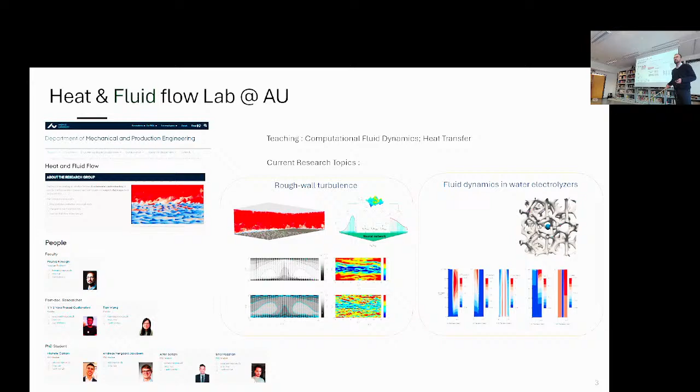Oops, I think I'm disconnected. I can see the presentation here, but maybe the cable is not... Okay, now it's coming, I hope. I just clicked, I don't think it's enough movement.

Well, of course, I need to motivate why roughness or rough surfaces are important. There are many real-world applications in which the solid surfaces that are in contact with turbulent flows are not smooth - as a matter of fact, this is the rule rather than the exception. Smooth surfaces are rarely found. Some examples: if you look inside a pipe, a ship hull, or zoom on a turbine blade, or many other applications, you see that the surface is rough. The main effect of roughness on the flow is, of course, a drag penalty - you have more drag on the rough surface. It's important to remember that roughness looks differently depending on where you look. In either of these applications, the texture and topography of roughness is different, and depending on that texture, the amount of drag penalty can be very different, even if you have the same roughness average height, so to say. That's basically what motivates this research.

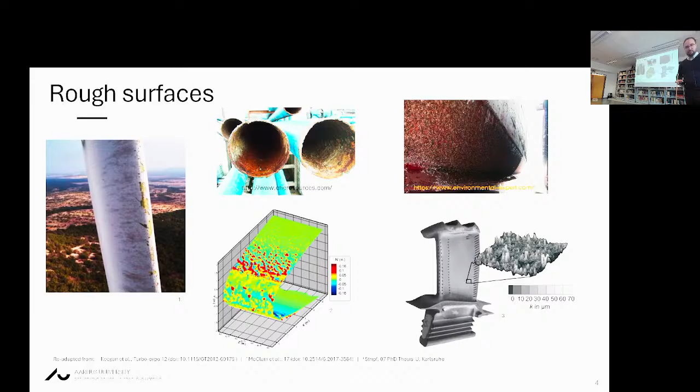Yeah, okay. Okay, good. So I think I need your help every 2 minutes. This is going to take 2 hours, hopefully not. Okay, so sorry for showing this.

Everyone who passed Fluid Mechanics 1 knows this diagram, but it's mandatory to show it if you're talking about roughness. This is the so-called Nikuradse diagram from the 1920s-30s. These experiments were done in Göttingen. They roughened the pipe with uniform sand, and depending on the normalized size of this sand, if the Reynolds number is large enough, the friction coefficient only depends on the size of the roughness.

That is what we call a fully rough regime. Now the question is, how about the case when you have a different type of roughness that is not the sand grain, which is of course the case most of the time. If you have any arbitrary roughness, and you reach the fully rough regime, you match one of these sand grain sizes, and that's called the equivalent sand grain roughness of that surface.

So basically, Ks, or equivalent sand grain size of roughness, is a sort of currency. How rough is your surface? This is like this sand grain, right? So that's how we do it.

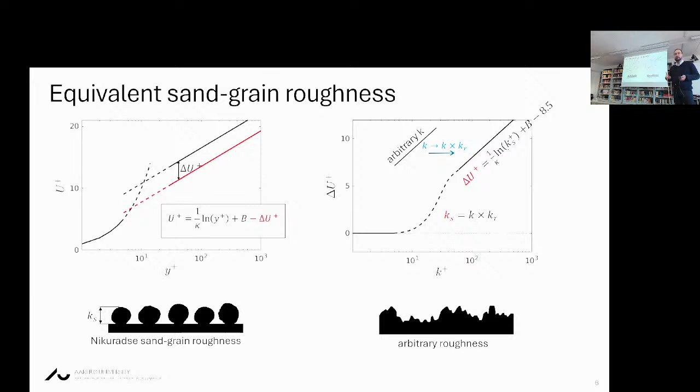So that's how you can actually find this quantity by running experiments or so. Well, the reason why this whole business started was in my institute.

It's a very practical reason. Someone came to us and said, okay, I have this piston, like it's an internal combustion engine. There was a time when people did research on internal combustion engines. So it's quite old, I would say—not very. Until 5-6 years ago, people still thought there was a future.

They wanted to run RANS simulations on this surface, but they didn't know the equivalent sand grain roughness of their sample. The question is, okay, what is that? And there is no way to know it. This is quite important if you want to run RANS simulations. So we basically scan this surface, and then we run numerical experiments, because it's much cheaper than actual experiments.

And they are not perfect numerical experiments, I have to say that.

So basically, we run DNS of turbulent flow in this classical periodic box with walls at the top and bottom. So basically, we put the rough surface at the wall of our domain.

And then for the simulations, we use SIMSON, which is a pseudo-spectral solver developed by KTH people, like Philipp Schlatter and his group. We also implemented an immersed boundary method, and pseudo-spectral and immersed boundary are not the best friends, but somehow there were suggestions that it can be done. And then we implemented that, and this is just an example of how the flow field would look like.

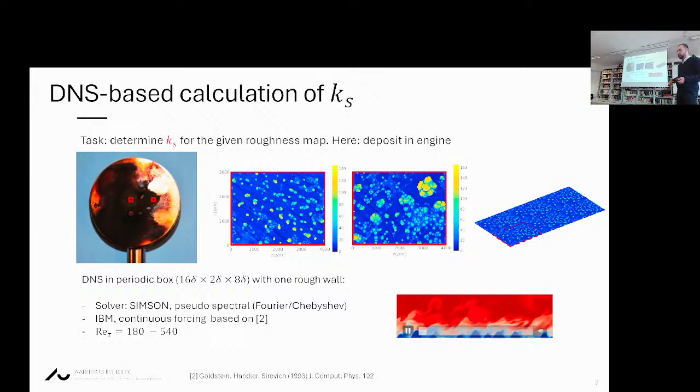This is the temperature contours on top of the roughness elements. I think temperature is a better way to visualize what you're doing. So, okay, now I think again some help because it doesn't go.

Okay, now it works. So, well, we run DNS at different roughness heights. So when you change the Reynolds number, of course, the physical height of roughness in viscous units becomes larger and larger, and you see this downward shift. You can measure it, and then fit into the Nikuradse asymptote, and you find the sand grain size of the roughness. So in this case, we determined that the sand grain size is 290 micron for this roughness, and this is the physical size that I put a scale here that you can see.

And you cannot really find 290 micron anywhere in this picture. It's important to know that Ks, or the equivalent sand grain size, is not a physical size. It's like a flow quantity. It's not a measurable physical quantity. You cannot really find this anywhere.

It has to be larger, otherwise it's smooth, right? It behaves as smooth. I don't know, well, actually you can say this.

K plus is here 10 to... so basically, this K plus is what you're asking for. So it's about 70-ish. You can't go too high. That's a problem with DNS because it becomes very expensive. But you just have to go high enough to reach that asymptote, which in our case is 70.

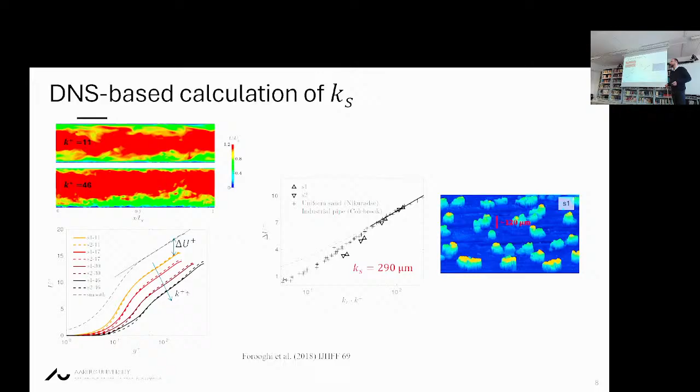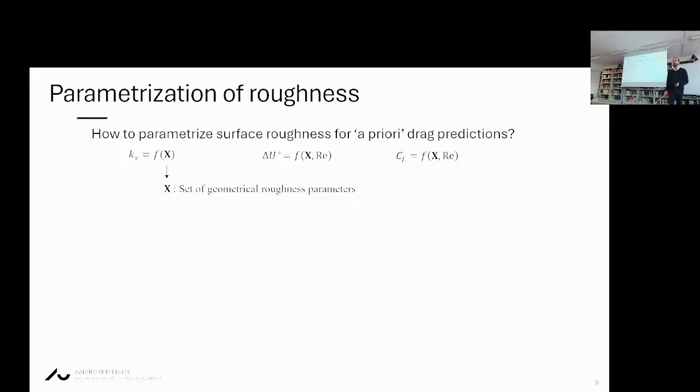So basically, now here is the proposition. We want to find Ks as a function of x, and x is a set of geometrical roughness parameters. It's equivalent of saying I want to find the roughness function, then it's a function of x and Reynolds. So at this fixed Reynolds number, roughness function is uniquely related to Ks. You can say the same thing about skin friction coefficient. And then the question is what parameters you should use.

So if, let's say this is the roughness profile, it's of course always irregular. And then you can of course have the PDF of the roughness height. There is the tendency to use, let's say, the moments or the properties of this PDF function of roughness height as the predictive parameters in such correlations. So you can use the RMS height, skewness, kurtosis, or just the max minus mean roughness height. And there is also some people use this so-called effective slope, which is the mean streamwise slope of roughness. This is not a moment of roughness height itself, but it's a derivative, the first derivative in streamwise direction.

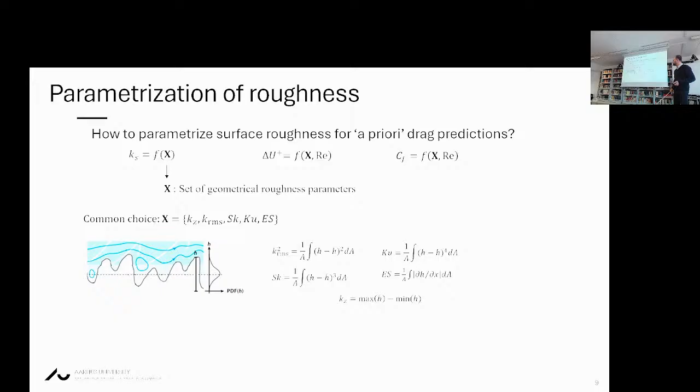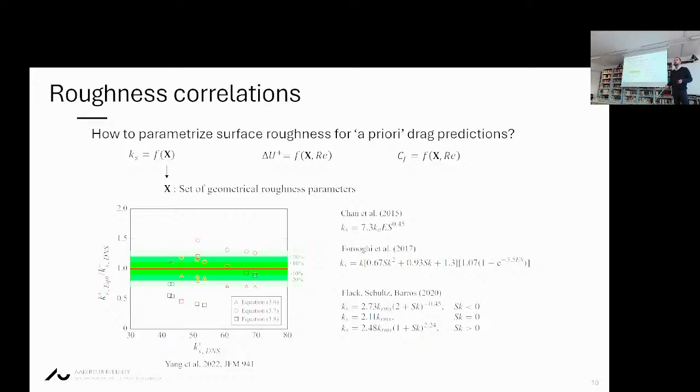And of course, there are many more correlations, but believe me, they are all more or less in the same range. So, and then what does it mean? Basically, what do we lose if you lose this predictive power? What does this error translate to? So there is this nice paper, Annual Review of Fluid Mechanics from 2021, and I just take these estimates from that paper because it's kind of a big claim.

They estimated a 10% uncertainty in prediction of drag, and calculated how much that costs in dollars or euros for different sectors. The shipping sector, aviation sector, and wind farm sector will face a lot of uncertainty because they cannot predict the drag accurately. This is the type of figure we use a lot when writing grant applications, so you see it's an important problem.

But I do it because I find it interesting. Of course, it's also important for real world applications. And if you have a heat transfer problem or mixing problem, the uncertainty can be even more significant.

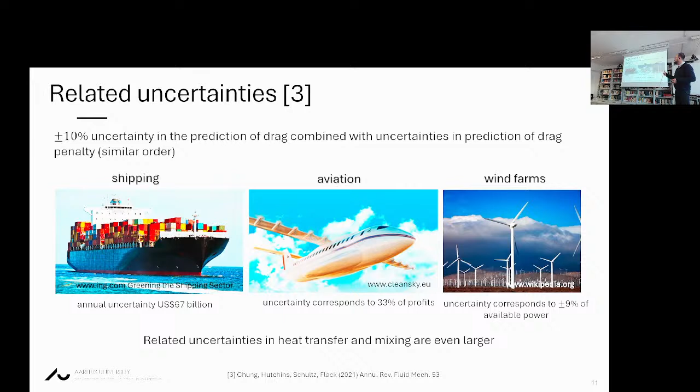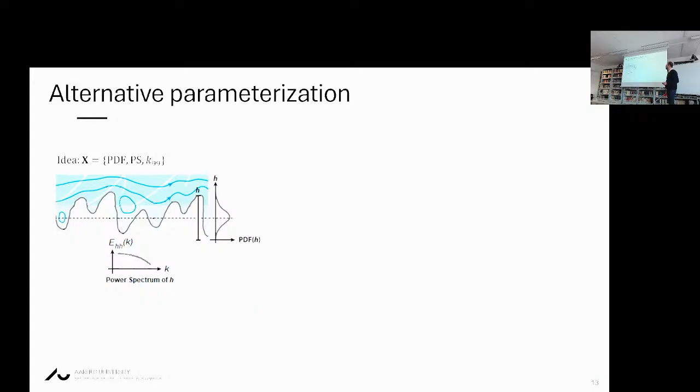To try this idea, we thought we need many samples with different PDFs and spectra, and then try to fit a curve. Generating samples with different statistical properties is by itself not a trivial task.

So we use some sort of mathematically generated roughness, which we call pseudo-random, and happily we found an algorithm already published. You can basically prescribe the PDF and spectrum of the roughness distribution, and the output of this algorithm will be the actual roughness realization.

There is some randomness because it's a lower order input compared to the actual roughness you get. So it's still stochastic, but pseudo-stochastic, since you prescribe some input about what you want. Here you see 3 different PDF functions and 2 different spectra, and the combination gives you 6 different roughness samples that look different.

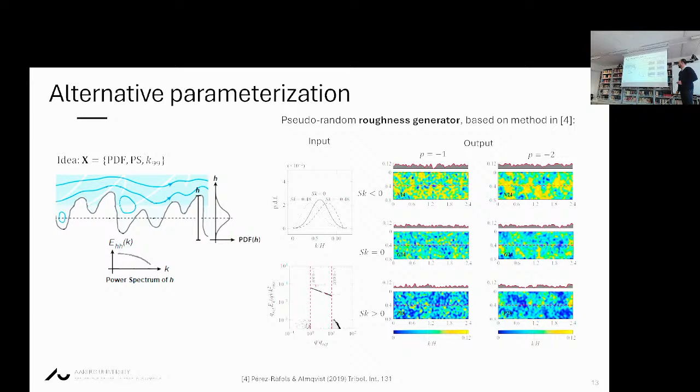For example, if you have a higher slope in your spectrum, it means smaller wave numbers, or large wavelengths, have more contribution. In the realization, you can see larger structures in the roughness. Anyway, this is how we generate roughness. Then of course the question is, does this artificial roughness behave like the actual roughness?

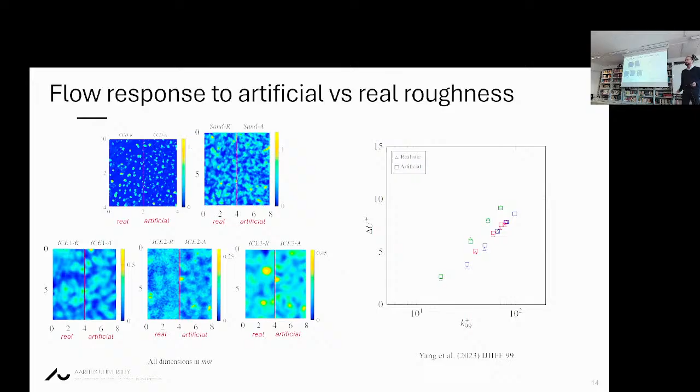But also, when you run DNS for both real and artificial and compare the roughness function, they are almost always on top of each other. So this is a true representation of the roughness.

The other problem you'd face if you want to run a lot of DNSs is computational cost, because even one DNS is expensive, and as I explained, you need high Reynolds numbers, so this is extremely expensive. One reason DNS for turbulent flows is so expensive is because you need a large enough computational domain so that you can capture most of the energy containing structures.

One idea is to use the so-called minimal channels, where you reduce the size of your domain in the span-wise and stream-wise directions. This is a brilliant idea—of course, unfortunately not my idea. We took it from someone else, but we proved that it actually works.

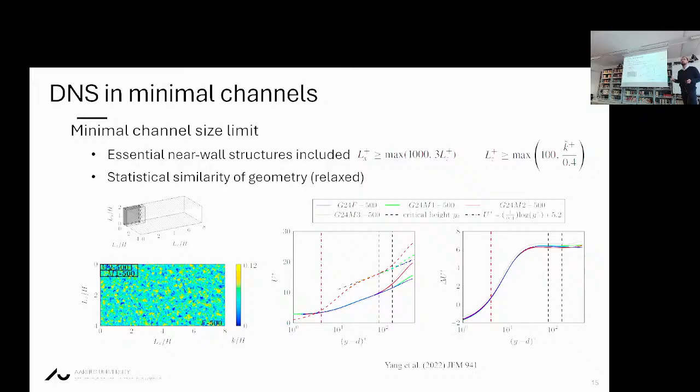So with this idea, we could now do a lot of DNS, much more than anyone would be able to do in a full channel.

So now we have an idea: we want to use the PDF and power spectrum of roughness as input and get the KS as output. Our model is a neural network, and the only reason we use it is because we think it's a good way to fit a nonlinear curve when you have a lot of input, a high order input.

As the input layer, you have the discretized form of the power spectrum and PDF. We discretize it, and each one is one input value or input node. You have some hidden layers, and the output is the normalized equivalent sand grain roughness. We normalize with K99, which is the 99% interval of this PDF—it doesn't matter, K99 is just a physical scale of roughness that we use to normalize.

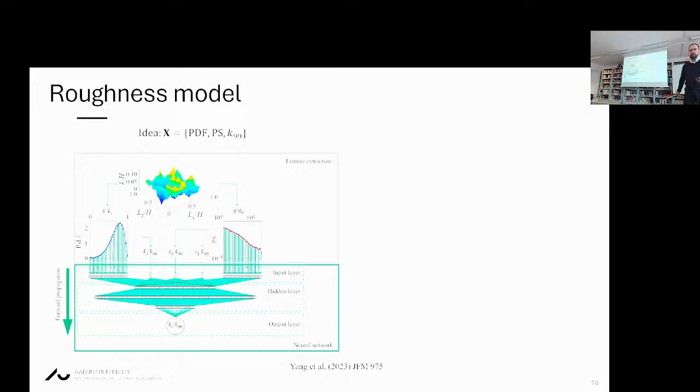I'll try not to explain too much since it's not critical, but basically we randomize the roughness generation method and produce many roughness samples that are very different. Through an algorithm we learned from other people, we picked the 80 roughness samples that are most informative, that minimize the uncertainty of the model the most. This is what we call design of experiment, or active learning, or whatever—statisticians have a name for it, others have different names, but that's basically what we do.

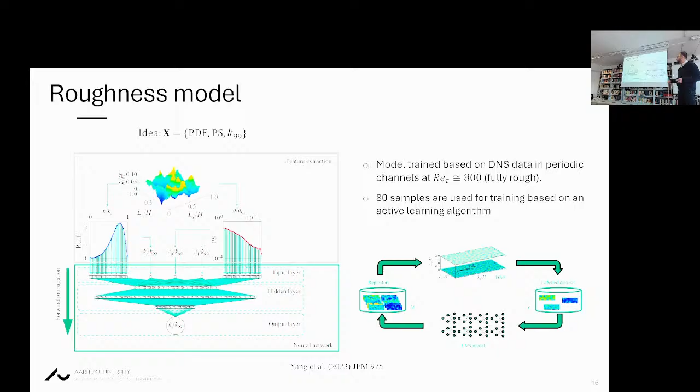We pick up the experimental points in a place that minimizes the uncertainty of the whole model. Here I show some of the samples, some of the roughnesses we use to fit this model to, and you can see we have quite some range.

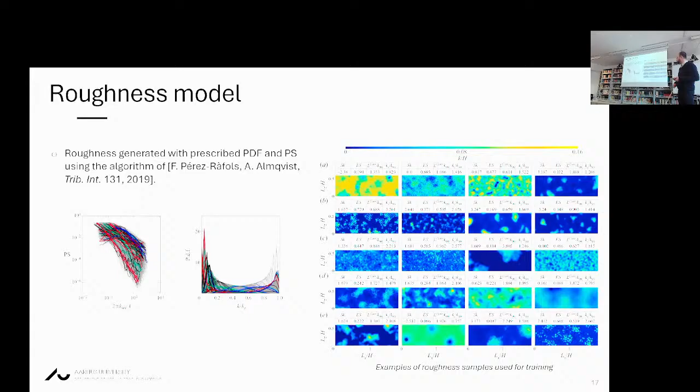Here you see the range of PDF and power spectra. We use Gaussian PDF, Weibull distribution, and bimodal. These are the types of PDF that people say can represent roughness in the real world, based on what you learn from literature. Now the model could reach an accuracy of about 10% or less on the average error, and the max error is between 20 to 30%, which, depending on who you ask, can be just a marginal improvement or a great improvement.

When we test the model, we split the test data into 3 data sets. The first data set is the test cases generated with the same algorithm, so we call it internal. These samples are not seen by the model, but they're generated with the same algorithm, so maybe there's still a little bit of familiarity because it's the same type you trained with.

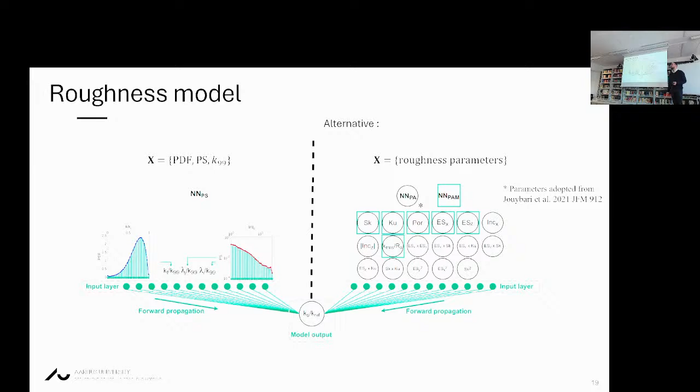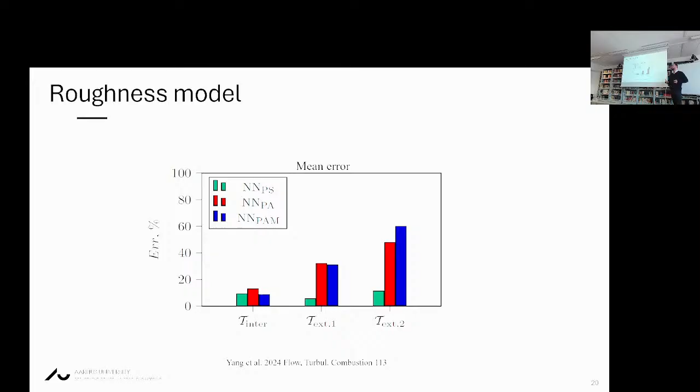Anyway, these are models trained not with PDF and PS, but with a selection of parameters. The input is different, and the error increases, especially if you test against a different type of roughness. But if you use PDF and PS, we claim you have some sort of generalizability. They include enough information for the model to be able to generalize.

Next, we thought, okay, we trained this neural network and there's probably a lot of physical data embedded in this network, which is very hard to interpret because at least I don't know how to interpret how a neural network works. Maybe Paula, you can help us with that. But it's quite some headache, right?

So we learned from some machine learning people about this so-called layer-wise relevance propagation analysis. What does it do? When you have a neural network as a model, you have different layers. The input given is given at the first layer as a vector, and there's this way of calculating how relevant each value of the input is to determine the final output of the model for a certain point.

Let me give you an example, this is how I understand it. Let's say you have a neural network to classify these three photos: is it a horse, a cat, or a bird?

Your model takes pixels as the input, to say, for example, this is a bird. Now, if you apply this layer-wise propagation, whatever it is called, it gives some pixels a higher relevance score. It's telling you that the pixels around the profile of the bird are more important in determining if it's a bird or a cat. So if a pixel here doesn't really matter, right?

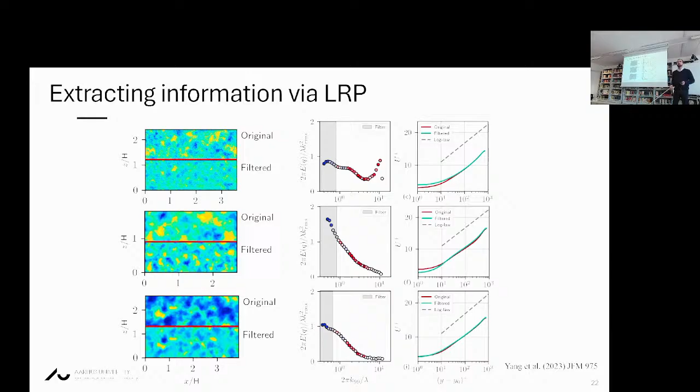We showed this with red profiles. And because you have the DNS data, you can also try to see where the drag is generated, where the local drag is highest. There's a very good correlation between where the drag is generated and where the peaks of roughness are not sheltered. We think what we observed in the previous slide, that large wavelengths don't contribute to drag, must be related to the sheltering effect. So if you have a roughness feature whose slope is smaller than this wake propagation angle, it's pretty much unimportant for determining the drag.

So this is a cool idea, right? The problem is, with the range of Reynolds numbers we have, you can't really change this angle much to see if this hypothesis is valid or not, because you'd need to go to much higher Reynolds number to have a significant change in this angle. So this is for now a hypothesis, and I think I'll skip the rest of the discussion for now.

So far, to summarize: if you have a higher order input in the form of PDF and PS, you have more accuracy and more generalizability in predicting the roughness function. The problem is this high order input is not easily available, so someone has to go take a photo, and that's not easy. In the end, I don't know how much we've achieved, because in the real world people may just have a few pieces of information about roughness. But at least now we know it's a compromise, and we know where we can go. We also had this lesson learned about the scales of roughness.

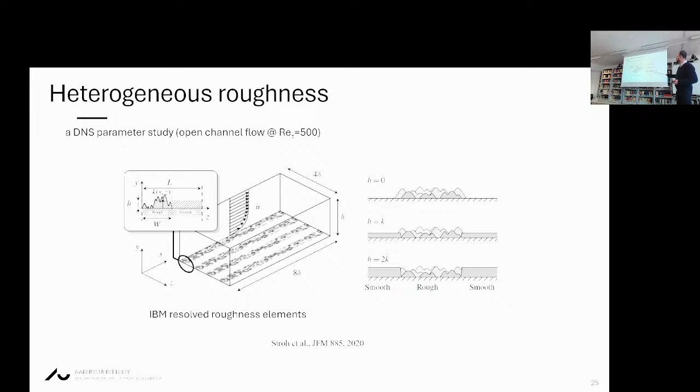I'm pretty bad about this, so please stop me if I'm speaking too much. The question is: roughness in the real world is really heterogeneous. That's what happens in reality. So we started by looking at a simplified, academic heterogeneous roughness, with roughness strips elongated in the flow direction. This has been a hot topic for a few years in the turbulence community. We also thought, for the smooth part of the wall, you can have different elevations.

When you have this type of heterogeneous roughness, you actually observe secondary flows normal to the flow direction. The classical knowledge about roughness is that it doesn't affect the core of the flow above a few roughness heights, but this is a totally different picture. You have structures arising from roughness that extend to the edge of the boundary layer, so this is a very nonlocal problem.

This is basically secondary flows of the second kind. The Reynolds stresses are not homogeneous in the spanwise direction, they have a gradient, and that creates a sort of secondary motion. This is similar to a square duct: if you have turbulent flow in a square duct, you get secondary flows near the corners. This is essentially the same phenomenon, or nearly the same.

We also see that the sense of motion changes if you alter the relative height of the roughness and the smooth part. People in the community observed this, and here we can show that it's basically the same thing: you can have both senses of motion in the same setup.

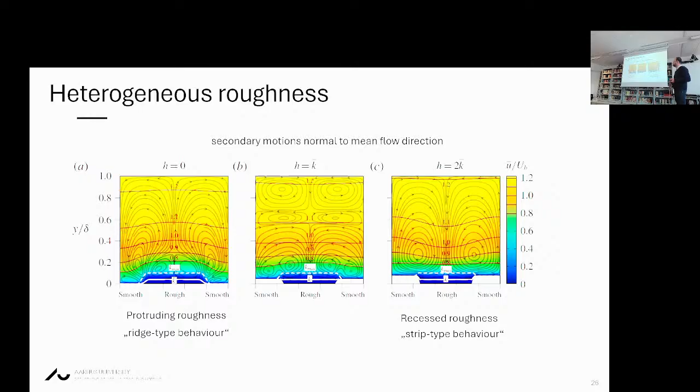So for engineering purposes, we should probably focus on something more realistic, and that's what we're doing at the moment: looking at patchy roughness, roughness in patches. I think it's a bit too much for today, and I'm almost at the end of my time.

So I'll just pass through these next few slides. If there's a question afterwards, we can discuss it. This is something we're currently looking at, and for a lot of real-world applications, patchy roughness matters a lot.

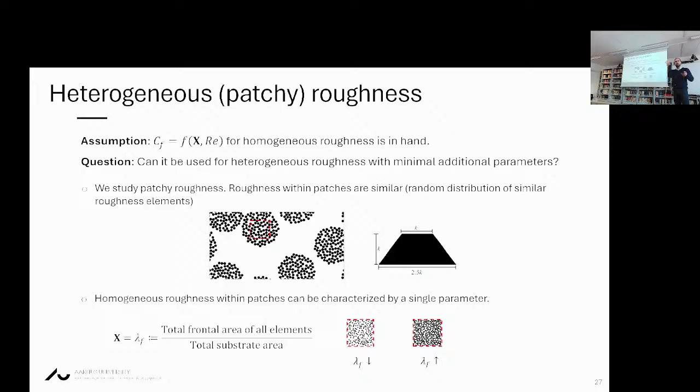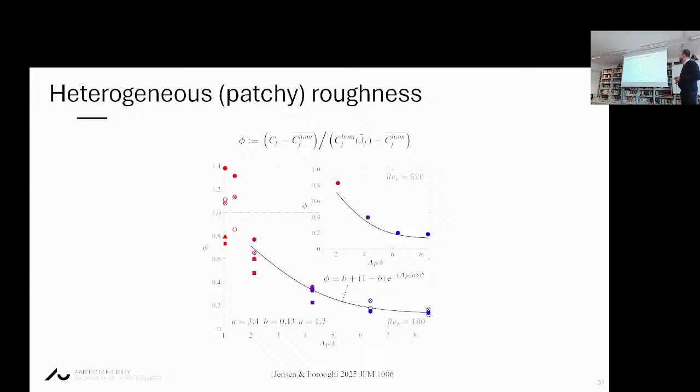For example, on ship hulls you have small creatures, barnacles, that stick to the ship, and they always come in colonies. They like to be in a community rather than spreading uniformly, so they form small colonies. It's important to look at this type of roughness, and we're trying to systematically figure out how to find the drag penalty of patchy roughness based on information we already have for homogeneous roughness. That's the main idea, and I can explain more later if there's interest.

Okay, before I move to the second part of my talk, of course many people over the last few years have worked on the results I showed you. I may have started this, but the main work was done by the PhD students, so I have to acknowledge their contribution—they did the work, and I'm just presenting it. And of course the collaborators from KIT, KTH, Melbourne, and ANU also contributed a lot. So this is really group work that I'm presenting.

So the last part of my presentation, which I'll try to keep short, is about what we are doing right now in my group, and which is the reason why we got in contact in the first place. This is fluid mechanics in water electrolyzers, which is very far from turbulence. But there is a strong motivation to look into these problems because we are having this green transition, and these are very important technologies. It's also a very fascinating problem from a fluid mechanics point of view that attracts me personally.

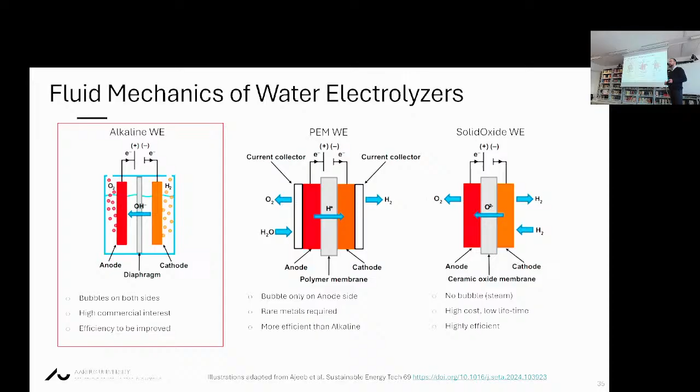Of course, porous electrodes are not the only type. You can have, for example, perforated plates, or a mesh. But I think porous electrodes are the most interesting, because obviously you have more surface area per unit volume with a porous electrode.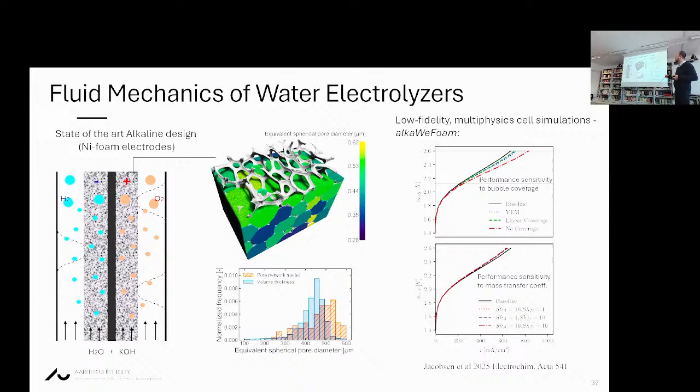So somehow, let's say tens of pores are suddenly filled with a lot of gas, and essentially they won't produce any hydrogen. That's really what happens — the chaotic world inside a porous electrode. But before we knew that, we tried to break this problem down into simpler problems, look into them one by one, and eventually reach the most sophisticated problem.

One of the problems we started looking at, using Basilisk, we run direct numerical simulations of a rising bubble through a pore network, which is very simplified — basically parallel cylinders as the pore network. We also assume the cylinders, or filaments, are perfectly wetted, so there's no contact line issue, which would be difficult to account for at this stage.

We also covered some parameter space: we varied the Bond and Galilei number a bit to see how it affects the flow, and we also changed the pore to bubble size diameter ratio. Here is the bubble path at different parameter combinations.

Here you have a very low Bond number — this is basically a hydrogen bubble of 1 millimeter diameter. If you go lower, the time step becomes too small and we'd have to find another way to do it. But we could go down to Bond number 0.1 without much problem.

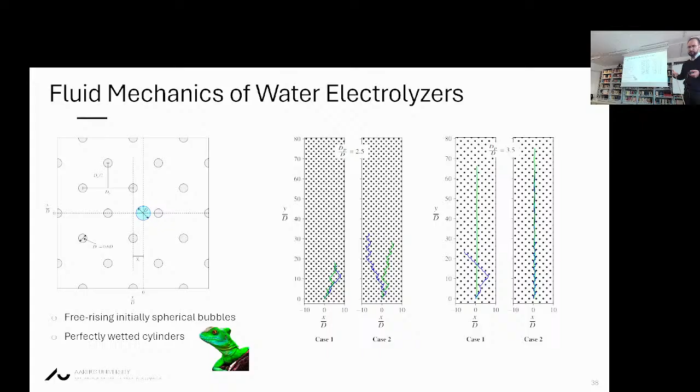And then when the bubble becomes more and more deformable, so we keep the Galilei number the same and increase the Bond number, you see a less chaotic looking path. An interesting phenomenon we observe is when the bubble is pretty stiff and the pore size is small, the problem becomes a bit chaotic, in the sense that it's very sensitive to initial conditions. If you change the initial location of the bubble a little bit, you get a different path, which is not too unexpected, but interesting to observe. At some point, with a larger pore and a more deformable bubble (higher Bond number), this sensitivity to initial conditions disappears. But this is very recent work in progress.

Another problem we look at, and we reached out to Stefan for consultation, is the problem of coalescence. When two bubbles coalesce on a surface, because of the surface energy released, you have a jump off. The question is what coalescences lead to jump off of the two bubbles and which don't, because the size at which the bubble leaves the surface is very important, especially given what we learned about electrodes being filled by gas.

So I cite this figure, readapted from a recent article by Demirkir et al. This is basically the Twente group and Krug's group at Aachen. They generated this very nice map experimentally, and I tried to translate it here. On the x-axis we have jumping and sticking regimes after coalescence of two bubbles, roughly the contact angle. On the y-axis is the Ohnesorge number. If you go up the y-axis, you have high viscous dissipation. On this branch of the plot, the dominant phenomenon determining sticking or jumping after coalescence is basically the adhesion force. In this other regime, the dominant phenomenon is dissipation.

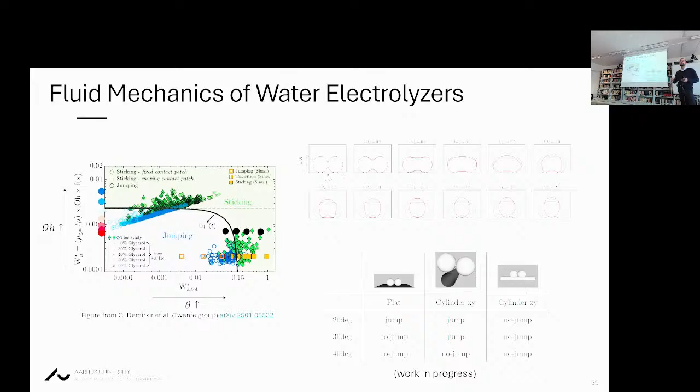And also we look at bubble rise through a realistic metal foam. It's a long way to go. Maybe we don't get to the end of this thing, but at least we have started it. And in the end, we want to have a better picture of under what conditions the gas is entrapped inside these pores, because it seems to be an important thing.